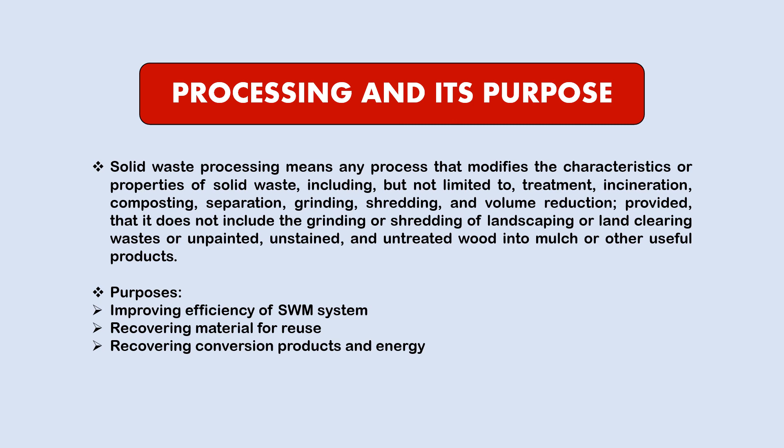One method of solid waste processing is mechanical volume and size reduction. The main purpose of this process is to reduce the volume and size of waste as compared to its original form. The waste products produced from this process are of uniform size and can be transported easily.

A sub part of this is volume reduction, which has some benefits and disadvantages. The volume reduction process reduces the quantity of materials to be handled at the disposal site, helps the crew load waste materials easily, and makes transfer very easy. Due to reduced volume, it occupies less space in landfills and increases the life of landfills. It's a very economical process because it reduces the cost and increases the efficiency of the waste management system.

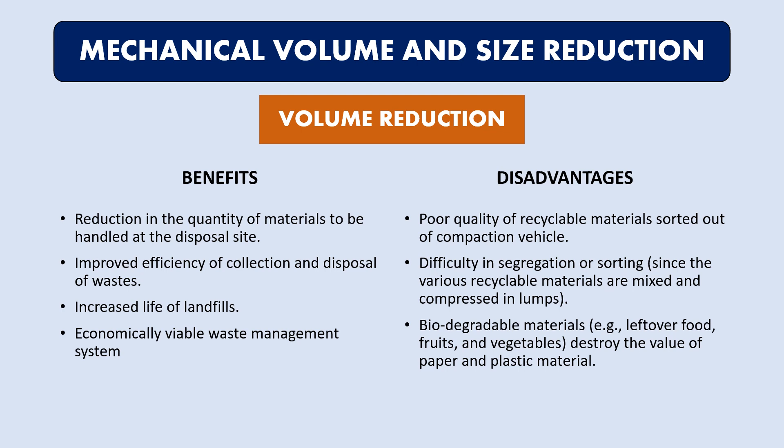There are also some disadvantages, like it being a poor quality technique for sorting, and volume reduction makes it very difficult to sort out the mixture of biodegradable and non-biodegradable waste. If a large amount of biodegradable materials is present in the waste, it destroys the value of the product that can be generated. For example, if the solid waste has paper and plastic material along with biodegradable materials, it reduces the value of the paper and plastics also.

Next, the equipment used for compaction are mainly of two types: stationary and movable equipment. Stationary equipment is placed near households, construction sites, or industrial areas where we dump our waste products. When the dustbin or stationary equipment gets filled up, compactor trucks or other transfer equipment take the waste material and dump it at the disposal site.

So that is the stationary equipment. As per the requirements, the stationary equipments are used. For household, we have light duty stationary equipment, and for industrial or commercial purposes, we have commercial or light industrial, heavy, or transfer station compactors that can be used.

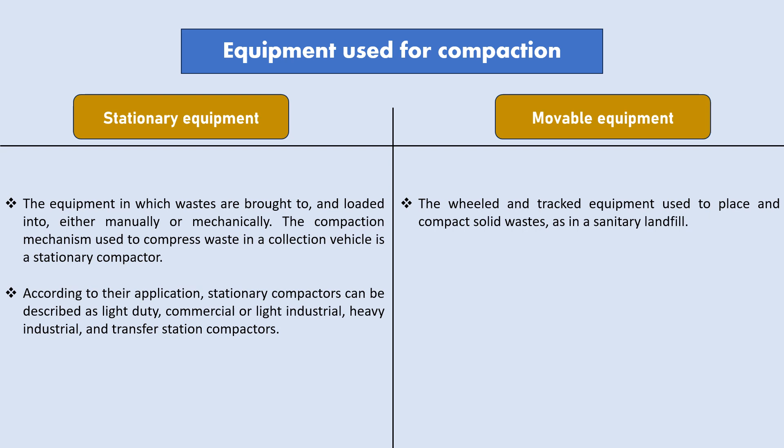Next, there are some factors that help us select the type of equipment that can be used, like size, composition, and moisture content of the waste. This helps us select the type of vehicle or compaction equipment we can use.

The method of transferring the waste is also a factor, as is the potential use of the compacted waste materials. For example, if there is more paper waste, we have to transfer the compacted waste to a station where they will prepare paper from the waste materials. Different types of compaction vehicles and compaction methods are also used here. What type of site or environment the waste can be dumped in can also be a factor.

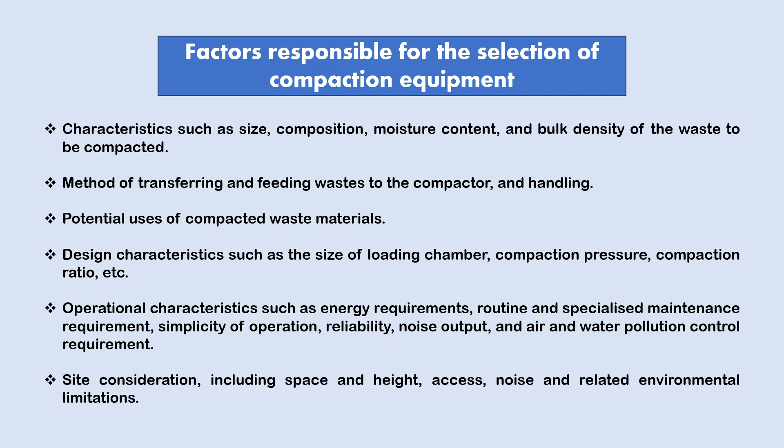Next is size reduction or shredding. This method is required to convert large size waste into smaller pieces, and the final product we get is uniform and of reduced size compared to the original.

This helps carry the waste from the collection site to the disposal site easily, and requires less cost and energy. From size reduction, we can also use different recovery methods to recover material that can be used further, or it can be converted into energy.

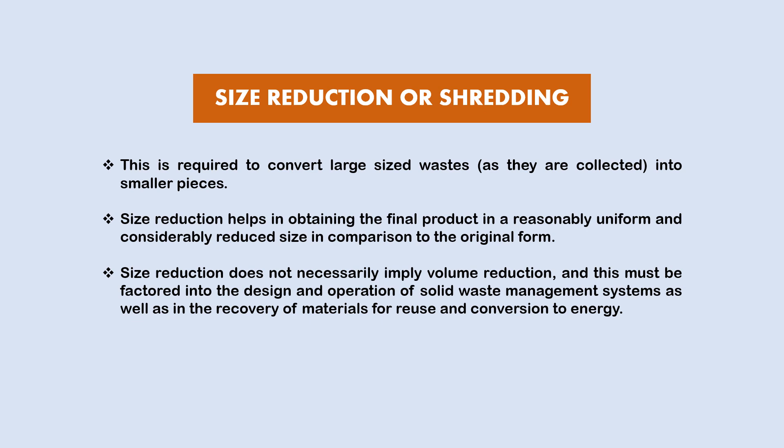The equipment used for compaction is of different types, but mainly two equipments are used in solid waste management: the hammer mill and others. The hammer mill is a commercial equipment where several hammers are inside the impact device, and when it rotates at high speed, it shreds the solid waste that enters the mill.

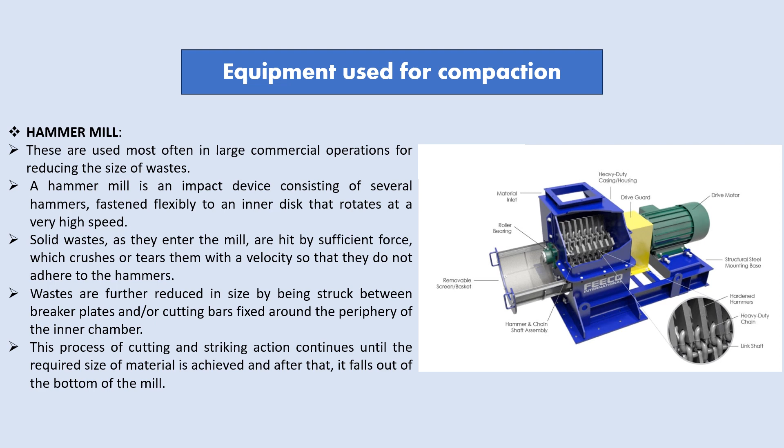The waste gets reduced in size by being struck between the cutting bars, and the process continues until a particular size is obtained, then it falls out of the equipment, which is dumped into containers that get transferred from this unit to the disposal site or to a recovery place where they can use these materials.

Next is the hydropulper. It's also a method to reduce size of waste materials. Here, high speed cutting blades are present on the rotor, and when it moves at very high speed, the metals, tins, cans, or any non-pulpable materials present in the solid waste get rejected.

The rejected material then is passed down a chute, and the solid slurry prepared from the hydropulper passes through the bottom of the pulper tank and is pumped to the next processing operation. For example, if paper waste is present, the paper solid slurry will be sent into paper mills for different uses.

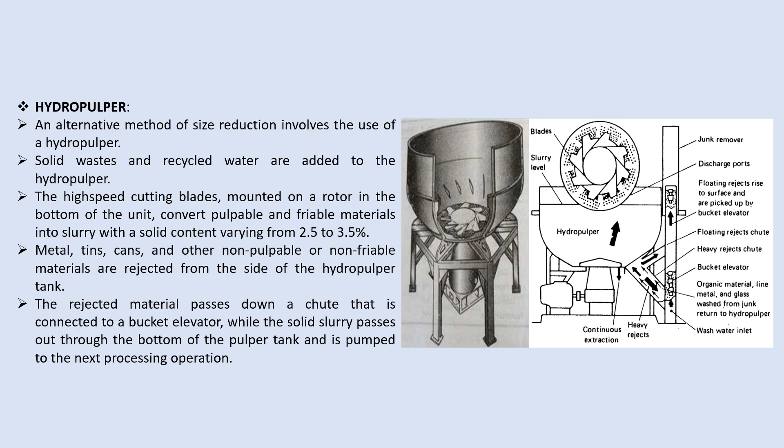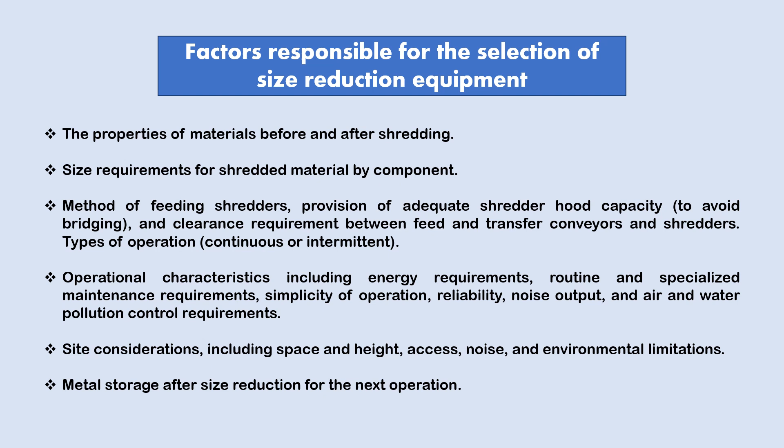There are also some factors that help us select which size reduction equipment we will use, like the properties of the material being shredded, the size requirements of the shredded material, the method of feeding shredders, and where we will dispose of the material. For example, if paper mills require it, then we will use the hydropulper as our equipment.